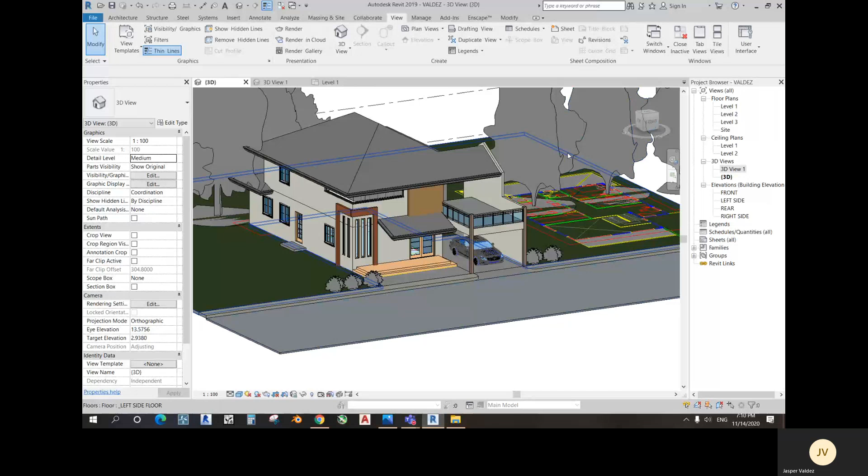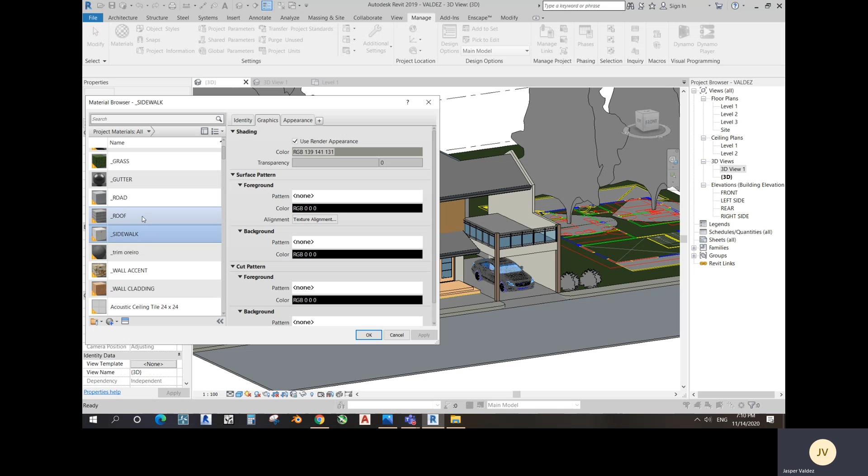So kung mapapansin nyo guys, nag-apply ako ng ibang materials. Kung titignan natin dito sa manage, nag-apply pa ako ng ibang materials. Meron akong deco stone, grass, gutter, road, sidewalk, and then wall accent, and wall cladding. Kung mapapansin nyo rito,

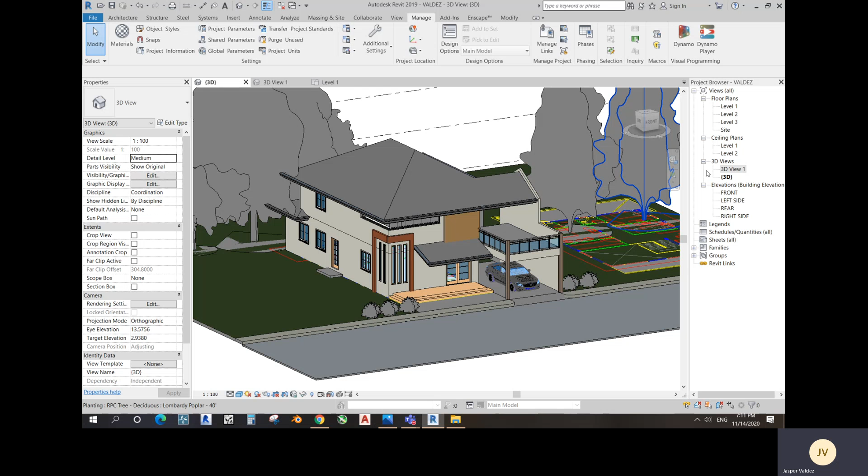Nag-apply ako ng different materials para lang magkaroon ng preview sa pag-render natin. Pag magre-render tayo, based sa past discussion natin, meron na tayong nacreate na perspective view. So double-click nyo lang siya dito sa 3D views.

Meron na tayong view para pag nag-render tayo. Ito na yung magiging final view na may render. Para mag-render, just key in yung RR and may lalabas na prompt. Itong prompt, pwede nyo siyang babaan, then medium, then 300 dpi.

Since wala naman tayong artificial lights at daylight lang tayo umaga, pwede nating gamitin itong exterior sun only. Later on pwede nyo siyang kapain, pati yung exposure niya after ma-render, para i-adjust yung contrast, brightness, ganon. So before final render, pwedeng medium muna at 300 dpi just to check kung okay na o final na yung mga materials na in-apply natin sa model.

After noon, kung okay na yung materials with this kind of render, pwedeng taasan ito, gawing 600 dpi. So for now, let's check using a setting of medium at 300 dpi.

I-check nyo lang kung may gusto kayong baguhin dun sa model nyo. So try lang natin i-render.

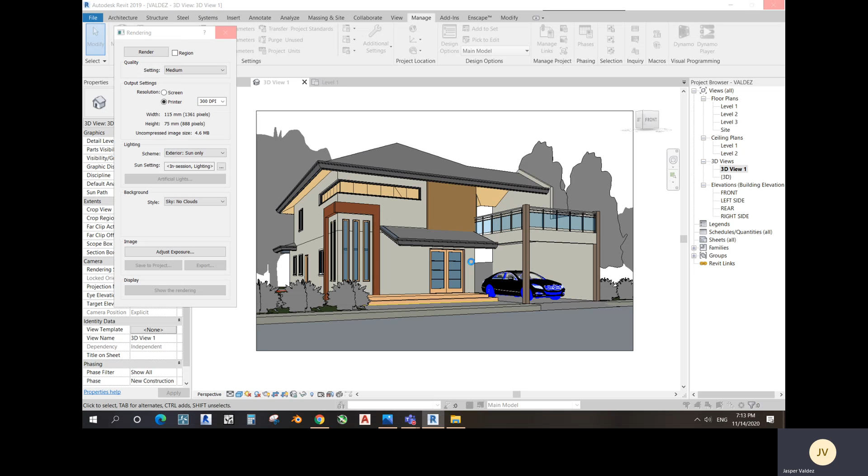Yung rendering guys, it will depend sa performance ng PC nyo. Kadalasan naman halos ilang minutes lang, mga 5 minutes, more or less, depende sa PC. At saka sa quality, kung 600 dpi yan, mas matagal yung rendering process.

Kung mapapansin nyo dito sa render ko, meron ng road, meron ng sidewalk, yung sa column, at dito sa wall accent na ito. So applyan nyo na lang siya. Kung ano yung mga gusto nyo pang ilagay na entourage and landscape, pwede nyo siyang dagdagan pa to enhance yung pinaka structure natin as well as yun sa material.

Kung mapapansin nyo, ito na yung initial render natin with a medium setting ng quality and a 300 dpi resolution. Dito pwede nyo siyang i-adjust yung exposure, kung pwede nyo siyang kapain, kung hindi pa kayo ganun ka-satisfy with regards dito sa render niya.

Dito sa adjust exposure, pwede nyo siyang timplahin, kapain nyo lang siya, adjust nyo lang siya. Kung medyo masyadong malakas o maliwanag, pwede nyo siyang kapain.

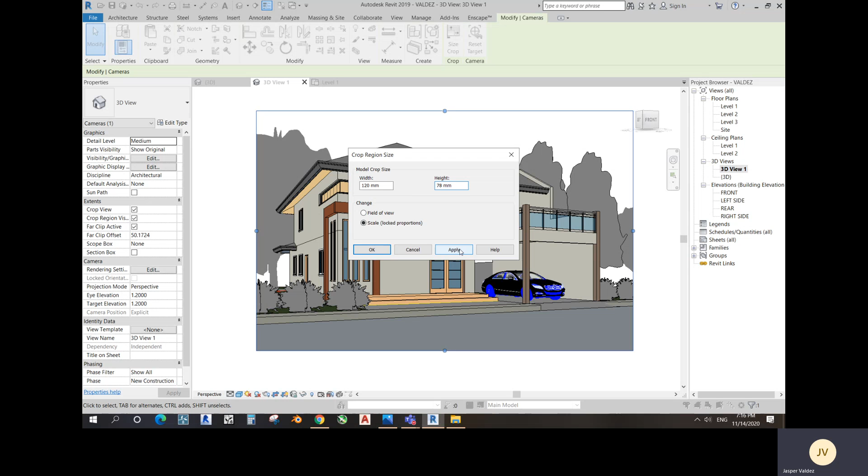So okay na yan, apply nyo lang kung may changes kayong binago. Kung final na yung materials nyo and yung model, wala na kayong babaguhin, nalagay nyo na lahat ng entourage, pwede nyo na i-final yung render nyo. So again, RR, and then eto na, medium, always medium lang. Okay na yan, importante yung resolution, so 600 dpi.

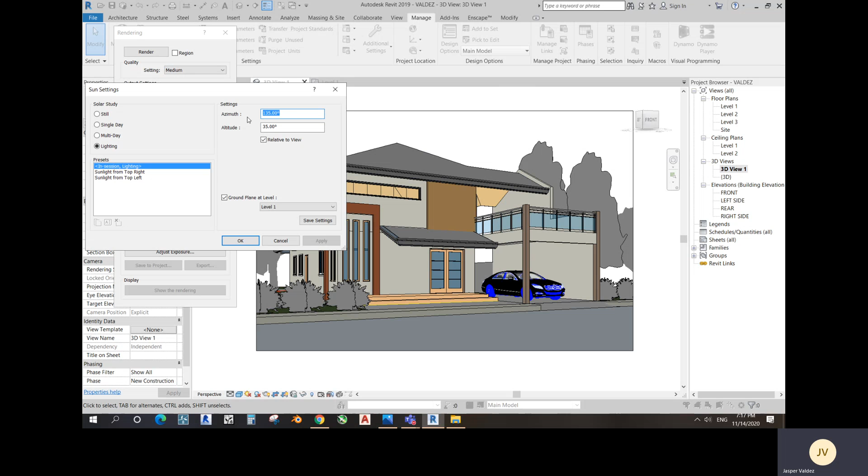So pwede nyo lagyan if you want to apply a cloud, just check na lang, kapain nyo. And then ito yung setting. Ito naman yung kung saan yung orientation ng araw, so pwede nyo rin siyang kapain. Yung i-type nyo lang yung azimuth and altitude, so pwede nyo siyang i-check.

Okay, so on our case, just to see no kung yung final output natin, so ito na siya. Render nyo lang siya. Mas matagal nga lang, compare doon sa medium, since mataas na quality na yung output natin.

So dito guys, pwede nyong dagdagan yung model natin. Pwede nyo lagyan if you want to put up another window kung saan, another accent, entourage. So walang problema if you want to put up a plant box dito sa harap, as long as yung presentation natin mas maganda yung output, walang problema.

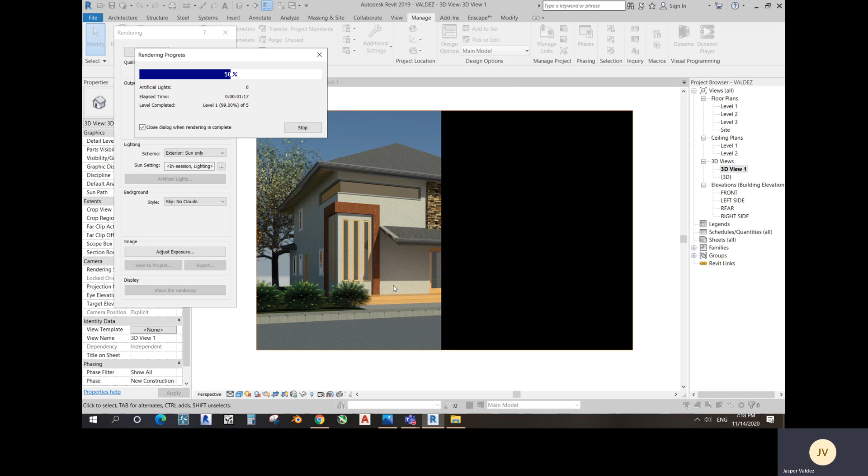So mas okay yun, at least you explore itong Revit. Mas na-apply nyo yung mga different commands, mas maganda yun. Unlike na ganito lang sa simple, nalilimit yung exploration natin. So pwede nyo siyang kapain, explore pa kung sakali, so mas okay yun.

So if you would notice, with a medium quality and 600 dpi resolution, so ito yung pinaka output niya. Halos doon nyo lang kapain yung timpla nung render natin, okay na yun. So if medyo kabilisan yung computer natin, more or less nasa around 2 minutes lang siya. Pero pag medyo hindi kabilisan, sometimes sa exterior it would take 10 minutes to render.

So yun siya, okay. So dito again, you could adjust yung exposure if you want to change yung brightness or highlight, shadows dito sa render natin. So pwede nyo siyang baguhin.

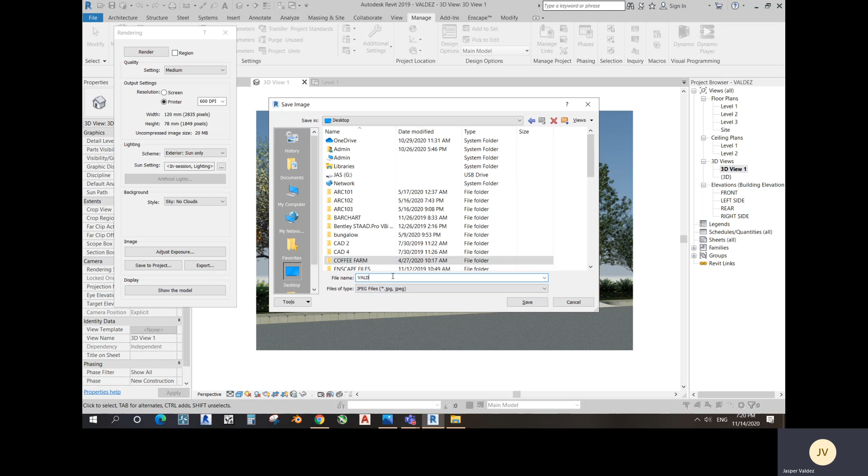So yan, kayo nang bahala. Right after changing this one, click nyo lang siya yung okay, and then export nyo lang. So export, and then locate nyo lang kung saan nyo siya gusto i-save, and then just rename it with your surname. So kung ito na yung naka-JPEG na siya, or if you want a PNG format, so any of two will do.

So save nyo lang, merong ano. So i-rename nyo lang siya as your surname.

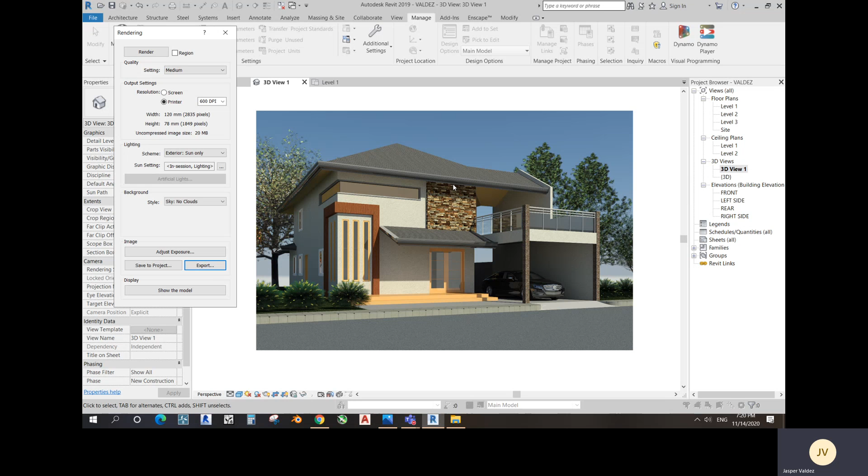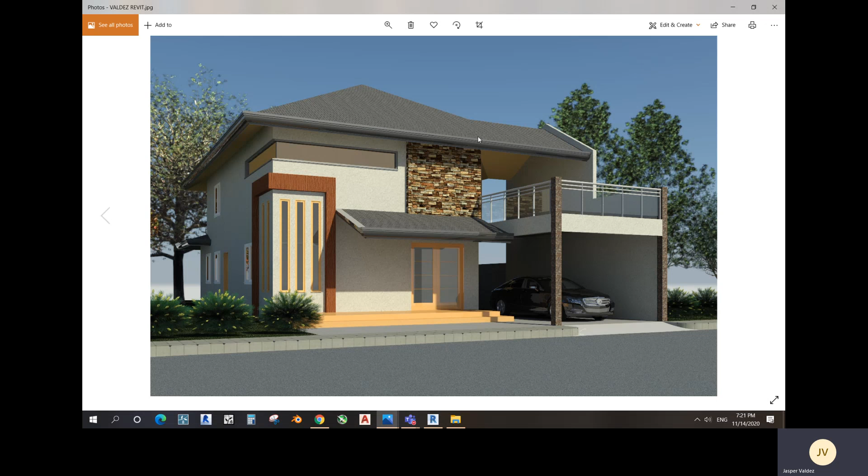Explore nyo na lang kung sakali may gusto kayong idagdag pa. Okay, so ito yung final output, ito yung isa-send, as well as yung Revit model with materials na.